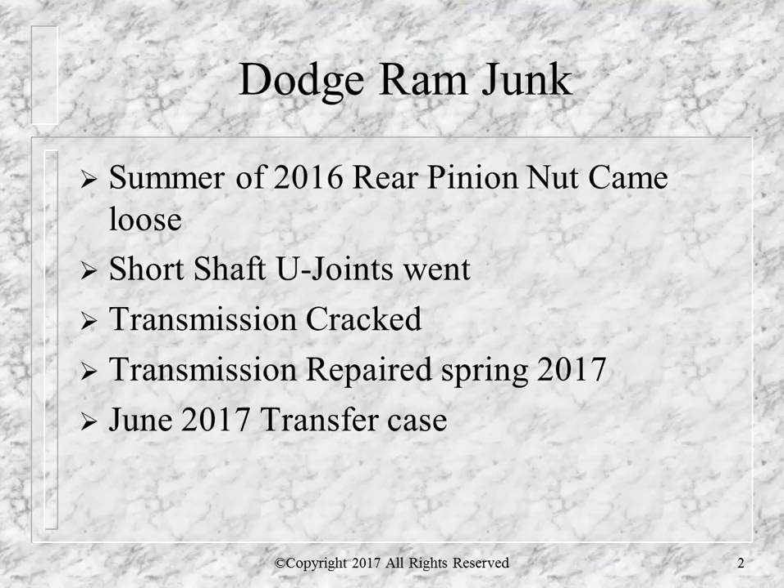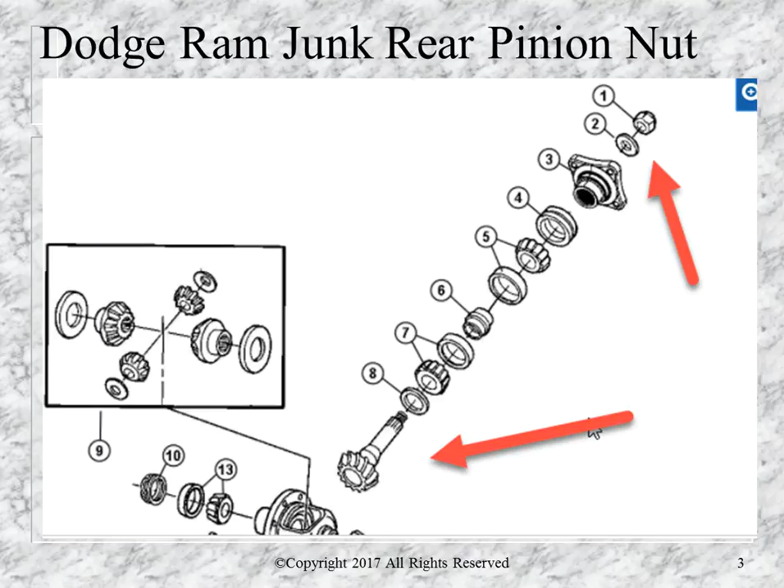The real simple fix is to have a tab washer on the nut. That's as simple as it gets. But it's a piece of junk, and that's what you get when you plan on buying Dodge Ram junk.

So there was a whining sound. After a period of time, the whining got worse. After investigating, the rear pinion nut was loose.

I talked to a Dodge service advisor in Huntsville, Texas, and told him I was out of work for 5 years and didn't have much money, and I just wanted to fix the exact problem. So they took it in, no problem, but the mechanic flat refused to even take the cover off the differential, and insisted on a complete ring and pinion overhaul.

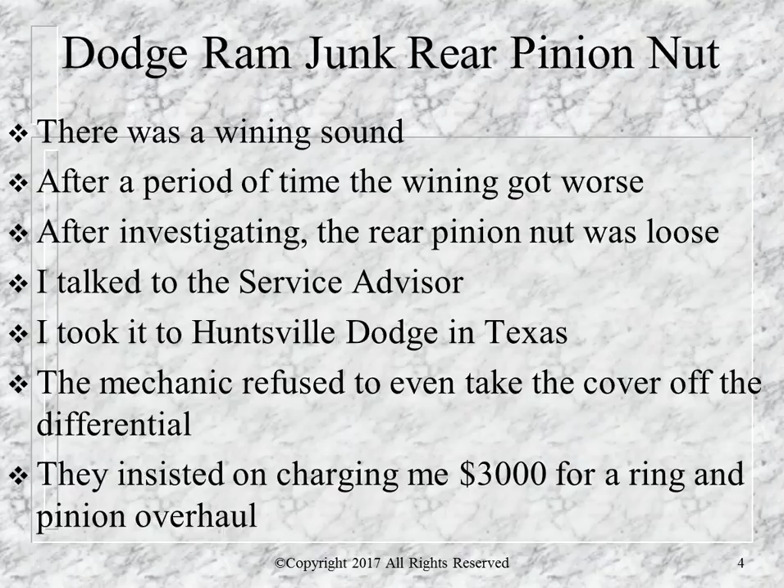This is what these thieves like to do. They stick it to you. They don't even give you a choice, it's either pay it or go somewhere else. So actually, I went somewhere else.

Dodge has had recalls on these rear pinion nuts. They want to prevent all this. All they have to do is install a tab washer that costs like 10 cents. So it's planned, it's orchestrated. They know exactly what they're doing, and they want to make sure they stick it to you. Dodge intends that their junk fails so they can sell you a $3,000 differential overhaul.

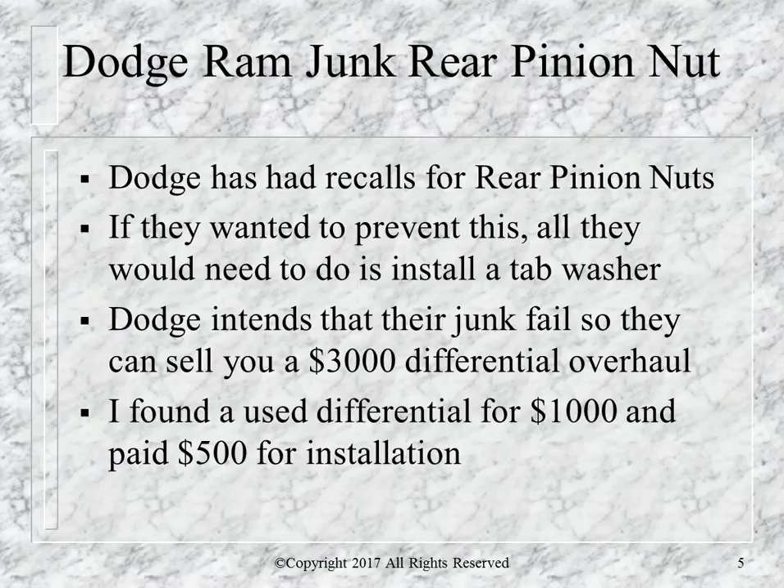I found a used differential for $1,000 and paid $500 for the installation.

When I told them I hadn't been working for 5 years, thanks to all the change that Obama brought us, they told me to go to this machine shop, and the machine shop did it.

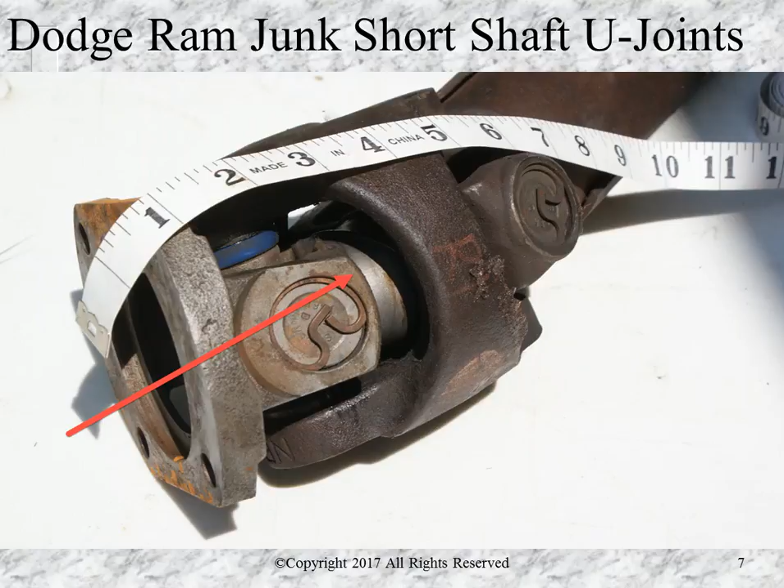But I had previously had this thing replaced, and they hadn't done it right, because there's a seal that goes on that inner roller bearing, and if that seal's not installed properly, then it's only a matter of time till the thing fails. These U joints cannot be greased.

When you buy it new, they cannot be greased. When I went and had them replaced, I told them I wanted grease fittings on them, and so they did that. So now I can, but they want them to fail. That's all part of the plan, so they can stick it to you some more.

These U joints are overly complicated and unnecessary. They wanted over $500 to replace the short shaft, and after telling them I'd been out of work for 4 years, they referred me to a machine shop.

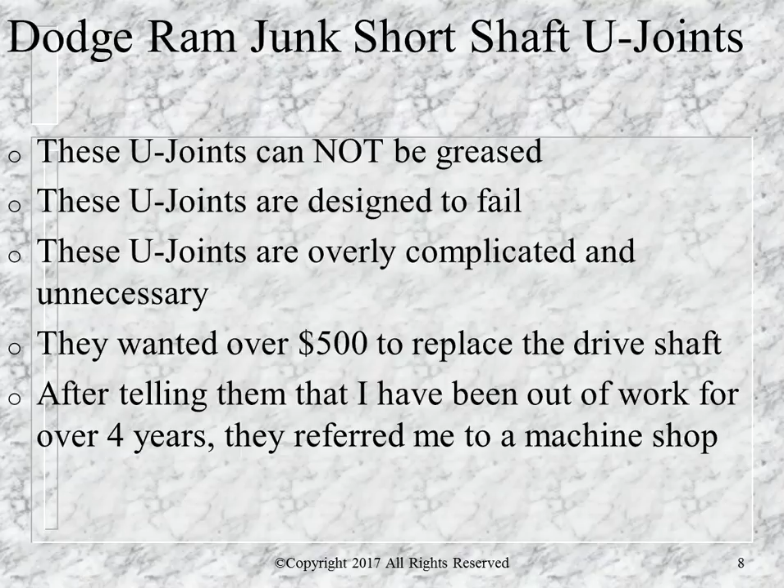I noticed then there was the transmission leak. I noticed a transmission leak.

One time it would not come out of 4th gear. I reset the codes and then it would shift, and the codes were related to low oil pressure. I cleaned it off with electric contact cleaner, drove it for a short distance and noticed that it was cracked, just about broken in half actually.

I didn't even go to the dealer because I knew what they'd be wanting. If you go on eBay, they want like $9,000 for a replacement transmission. I went and did a lot of shopping around trying to find a place that would do it, and a place in a price that I could afford.

And quite frankly, with the place that I found, I just flat out told them, take as long as you want because I don't have the money. And I'll hopefully by the time you get done, have the money. So I said, take however long you need. They wound up taking like 2 months to do it, but by the time that 2 months was up, I had the money. I actually had to sell some of my silver too.

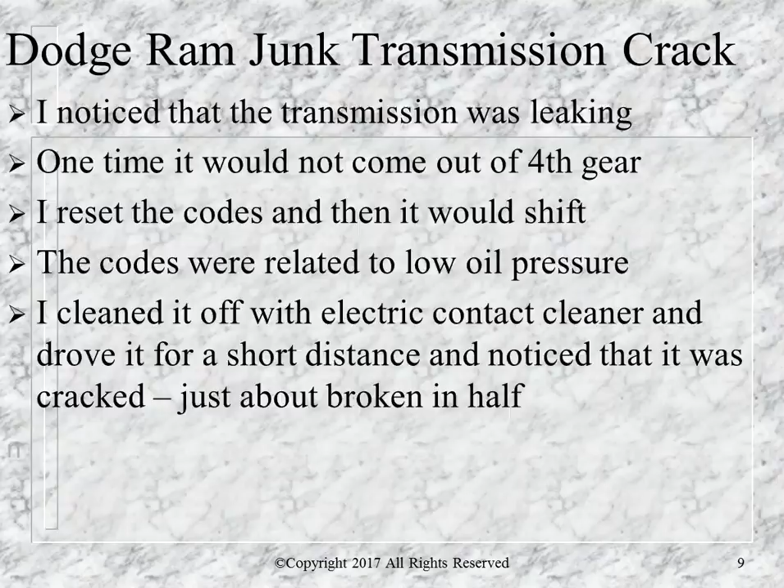And so I got it fixed. It cost me $3,500, and they overhauled the transmission and put in a new case. So they took my internals out, overhauled them, and put them inside another case.

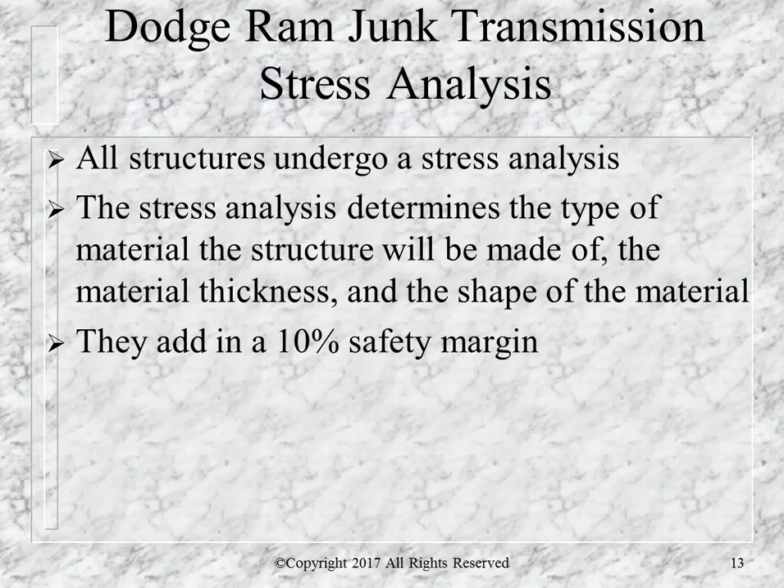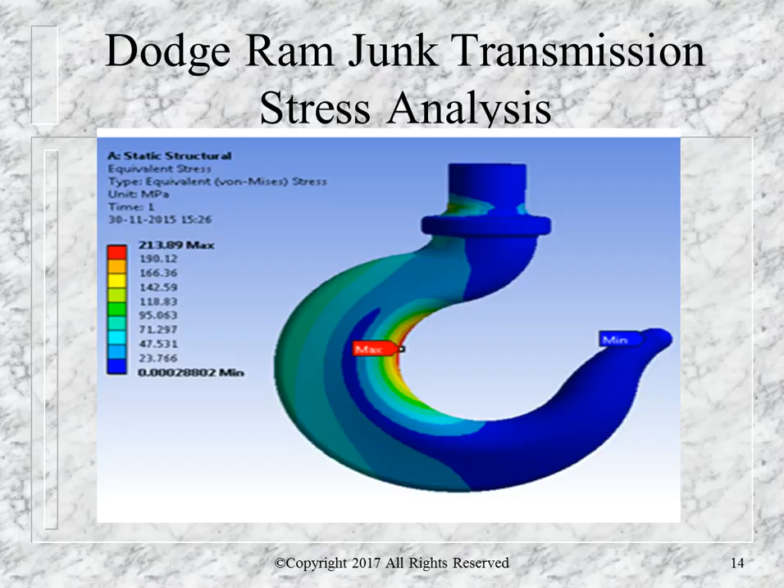The thing is, all structures - I happen to do aerospace engineering consulting - I know that they do a stress analysis, and the stress analysis determines the type of material the structure will be made of, the material thickness, and the shape of the material, and they always have to add in a 10% safety margin. They know exactly what they're doing. This is a hook, for example. The red area is the high stress area, so you notice there's more material there because that's where the stress is.

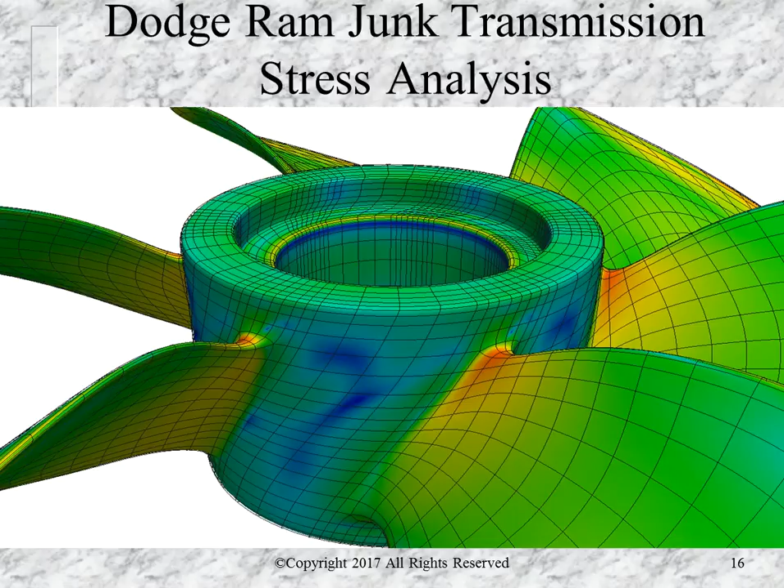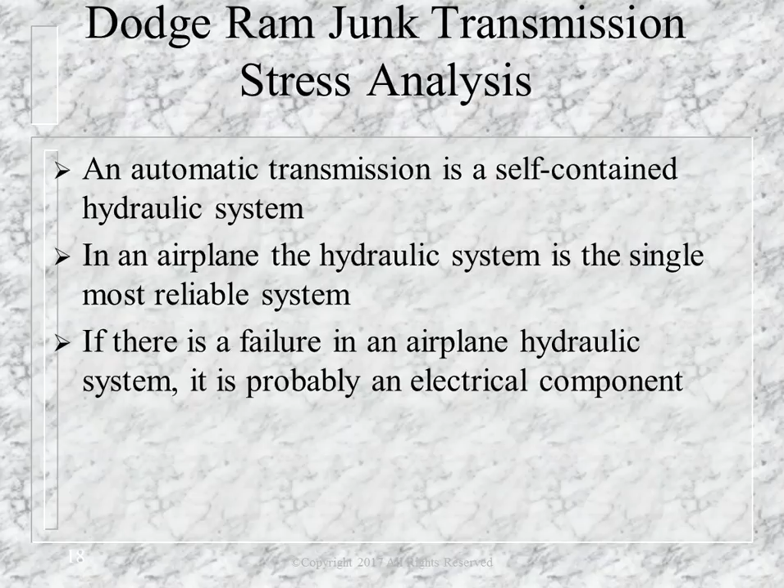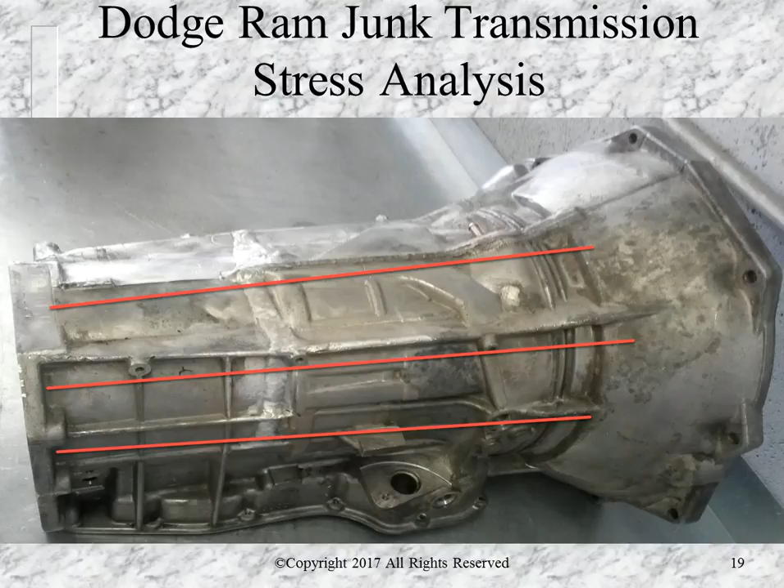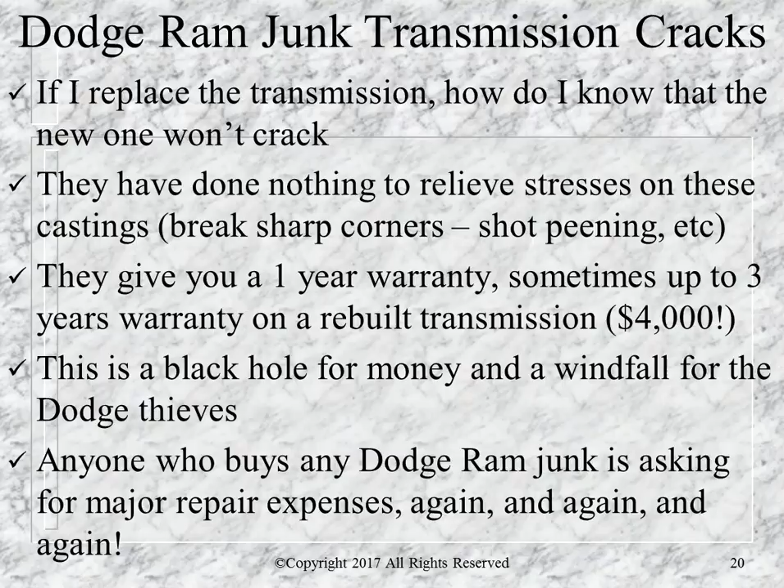So if I replace the transmission, how do I know the new one won't crack? And that's exactly what happened - the damn thing cracked again. They've done nothing to relieve stresses on these castings, like breaking sharp corners or shot peening. They give you a 1-year warranty, sometimes up to 3 years on a rebuilt transmission, and it's a lot of money, let me tell you. It's a black hole for money and a windfall for these thieves. Anyone who buys Dodge Ram junk is asking for major repair expenses again and again and again, and they're going to stick it to you.

And again, this is a picture of one with the stiffeners, where the weld was repaired less than 2 months after getting the transmission overhauled.

I got another vibration, so I removed the short shaft and checked the output flange of the transfer case. When it turns, it makes all sorts of rattling noises coming from inside. So the transfer case was coming apart.

So then I decided, well, maybe I'll pull a plug off of this transfer case. I pull the drain plug out, and nothing comes out.

I suspect it happened about a month after the transmission was overhauled. I think they let that transfer case lay on the floor. I'd never had any trouble with it, and I know for a fact it was full because I had drained the fluid probably 2 months before this all happened. So they probably left it laying on the floor in the shop, the fluid leaked out, and nobody bothered to check it when they put it back in.

But how are you going to prove that?

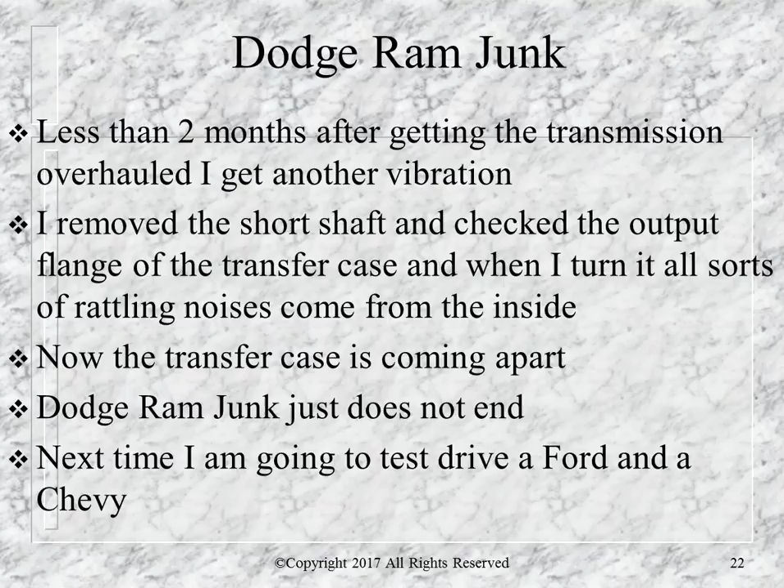Anyways, this Dodge Ram junk issue just doesn't end. Next time I'm going to test drive a Ford or a Chevy. Although I really love that diesel, that Cummins diesel. I heard Toyota's coming out with a Cummins diesel too, so maybe I'll look at that.

So less than 6 months after I replaced the Dodge Ram junk transmission, it starts leaking again. I took the junk back to the place that overhauled it, and the piece of junk is cracked again.

Somebody needs to sue these jerks. Don't get me going. Don't buy Dodge Ram junk. Certainly don't buy an automatic transmission. It is an abortion. And what they did is they actually got it overhauled.

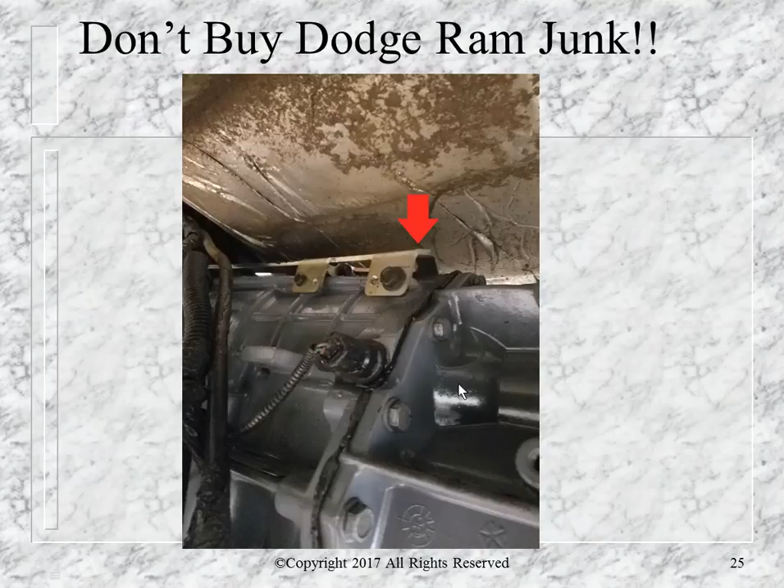So that's the bracket, a steel bracket they put in there to reinforce that piece of shit. This is showing the transmission installed, and this is the transfer case bolted up to the transmission. There's that bracket that goes in there and bolts right onto the transmission.

It is an absolute abortion. I would never buy Dodge Ram junk again. Certainly not an automatic. I might consider a standard, but I will never buy an automatic again. That is an absolute abortion. I'm going to look at Toyota, quite frankly.